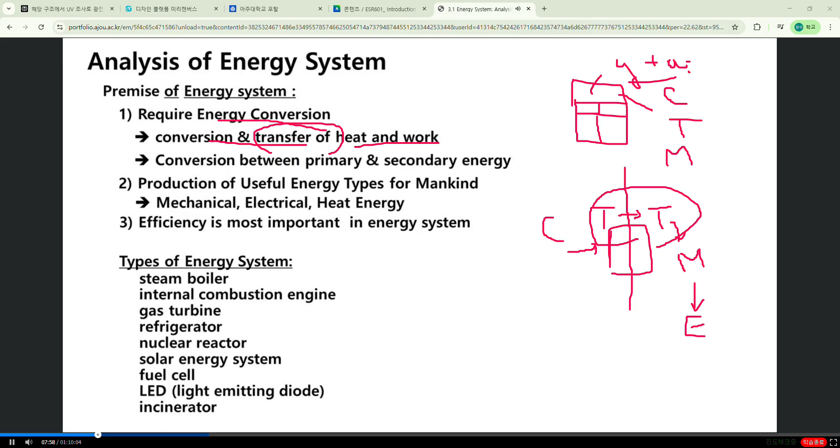Usually, in an energy system, there is conversion of primary and secondary energy. In this case, the secondary energy is electricity, and the primary energy is coal. Well, maybe this is not a good example.

If you have a refinery of petroleum, you put in the petroleum and you produce gasoline, diesel, whatever. In this case, petroleum is the primary energy, and gasoline, diesel is the secondary energy.

So primary energy means the energy that itself exists naturally, like coal, natural gas, and petroleum. Secondary energy is converted from primary energy into a form useful for human interest, like electricity, gasoline, and diesel, which are categories of secondary energy.

Another energy system premise is the production of useful types of energy, as I already explained. Electricity is useful to humans, and gasoline, diesel are useful to humans. Here, mechanical, electrical, and heat energy, and efficiency, is most important in the energy system.

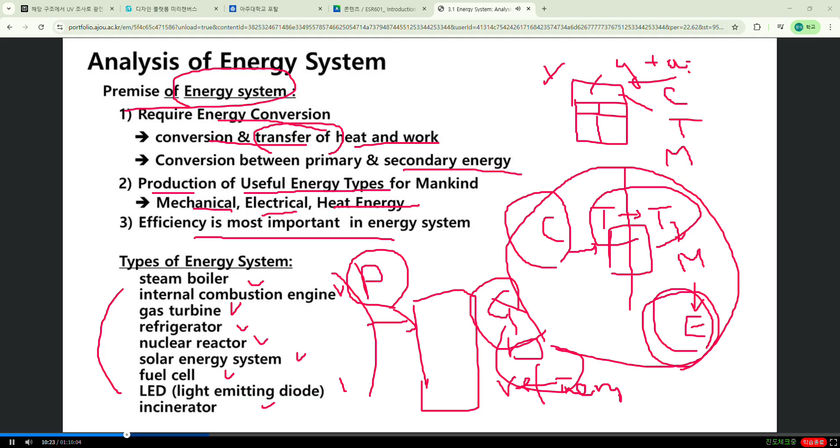However, I say here the most important thing is efficiency. Next, I'll show you the efficiency of different energy systems. There are very low efficiency ones, like the incandescent lamp, and very high efficiency ones, like the electric motor or electric generator.

Then how do you describe the efficiency? How do you define the efficiency? Usually efficiency is denoted as something equal to input compared with output, but the output should be useful to humans. So we say useful output. Efficiency is comparing the input and the useful output.

For energy conversion efficiency, the energy type changes - as I talked about previously, chemical energy changes into thermal energy, mechanical energy, electrical energy. Through this conversion, energy is conserved - that's the first law of thermodynamics, energy conservation. So initial energy equals final energy: E1 equals E2 plus E3.

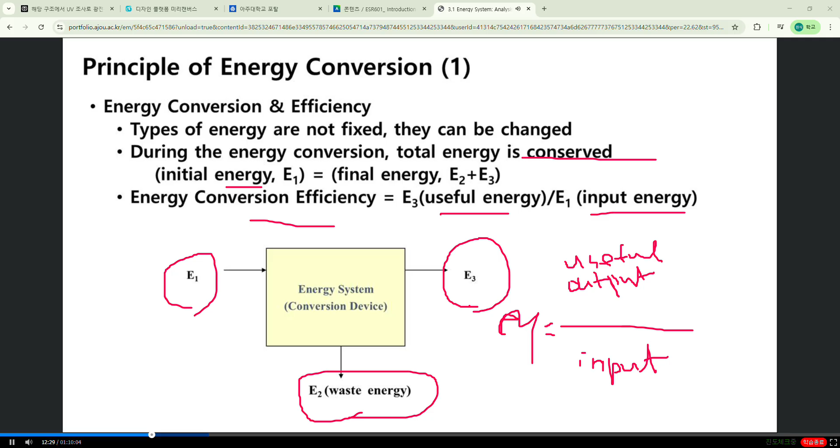I already talked about how there are many different energy types, and the efficiency can be very small, like the incandescent lamp, and the fluorescent lamp is only 20%. So we need to change this illuminating device into something else in the future, and that is going on right now - they're starting to change it into LED, light emitting diode.

Also, you know, changing into small heat engines - I mean relatively low efficiency heat engines like the steam engine and IC engine - into higher efficiency ones. So we want to change from this low efficiency group to a larger efficiency group in the future.

In energy conversion, heat energy is central - most fossil fuel based energy conversion systems operate through combustion. Once you make combustion, chemical energy is changed into heat energy. So heat energy is the key process of energy conversion, like in an automobile.

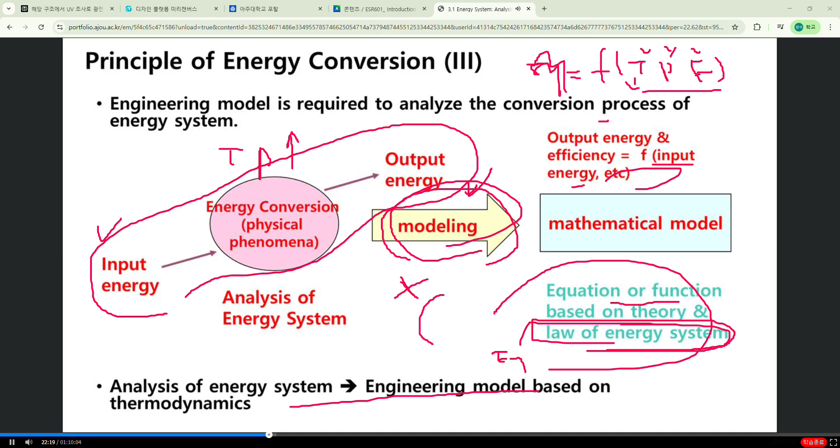You need the basic laws of the energy system, some basic theory required to develop the mathematical model. The most widely used basic law of thermodynamics is the first law of thermodynamics. Everybody knows that's energy conversion, energy conservation: heat equals internal energy plus work.

Heat is internal energy plus work: dQ equals dU plus dW. That's the first law of thermodynamics. Also, you can write it as delta U equals Q minus W.

Second law of thermodynamics - you can state the second law of thermodynamics in many different ways. With the second law of thermodynamics, you need to find out entropy. So this is entropy.

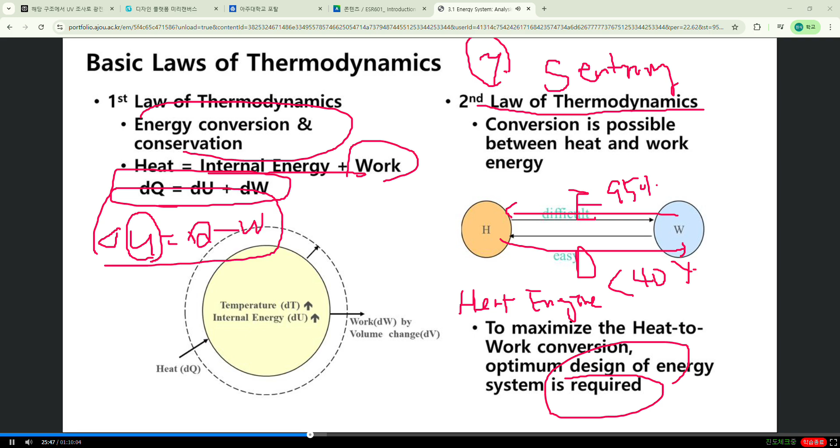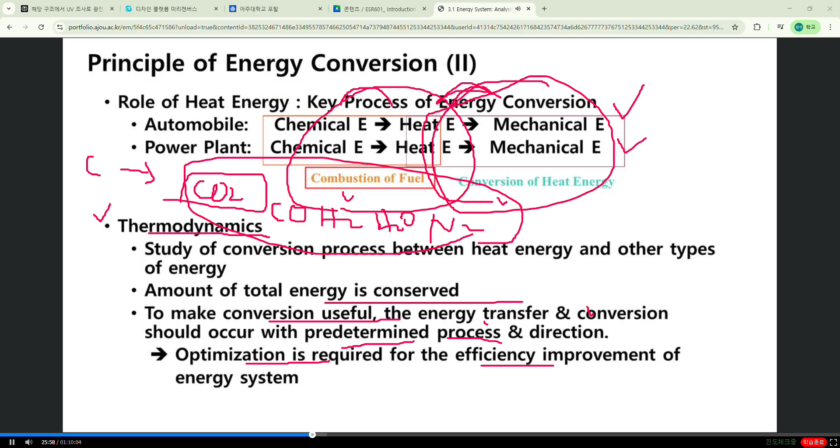Transfer of heat energy - they say the direction. You must go to a predetermined process or predetermined direction. This is the predetermined direction to make a heat engine: heat should flow down from the high temperature source to the low temperature source and produce work. So the heat efficiency is W divided by Q1.

In a refrigeration system, that's the predetermined heat direction the other way - from low temperature to high temperature. Because it's the same as water flowing from a higher state to a lower state spontaneously and producing work, like hydropower - however, if you transfer water from the lower state to the higher state, you need a pump, otherwise saying you need some work. Same thing: to transfer heat from the low temperature to the high temperature, you need work. So in this case, work is required - they transfer low temperature to high temperature.

We call that instead of efficiency, we use the coefficient of performance, because sometimes it's greater than 1. Coefficient of performance equals Q2 divided by W. So here the heat transfer from high temperature to low temperature is spontaneous; low temperature source to high temperature source requires work, like in a refrigerator, air conditioning, or heat pump - the same application.

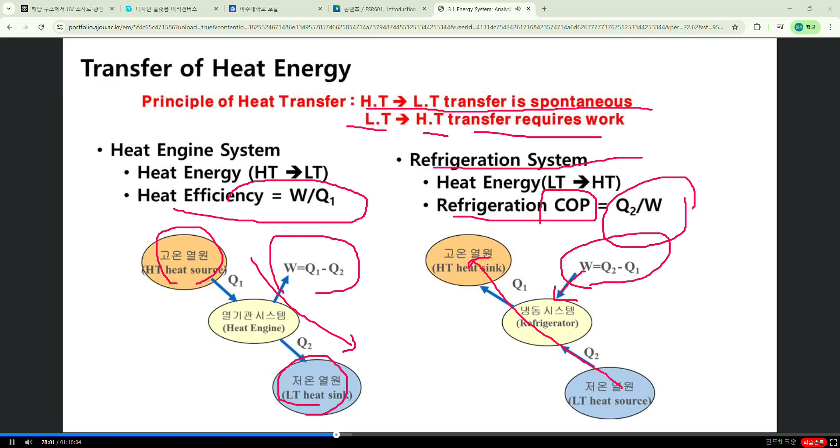So to analyze a heat engine system, if you want to analyze this heat energy system - let's say this is a steam turbine or gas turbine. Steam turbine usually is composed of a pump. You can draw it like this: pump, then boiler, then steam turbine, then condenser. Okay, this is the steam turbine.

So water is flowing through this way - that means clockwise, that's the clockwise direction. I mean the other way - like a refrigerator and air conditioner is counterclockwise, the other way. So at the pump, water is introduced and pressurized up to 150 atmospheres, usually, and modern steam turbines more than that.

Then that pressurized water goes into the boiler, and the boiler receives heat energy through coal combustion or a nuclear reactor. Because the water receives the heat energy, it becomes steam. So the high temperature, high pressure steam passes into the steam turbine.

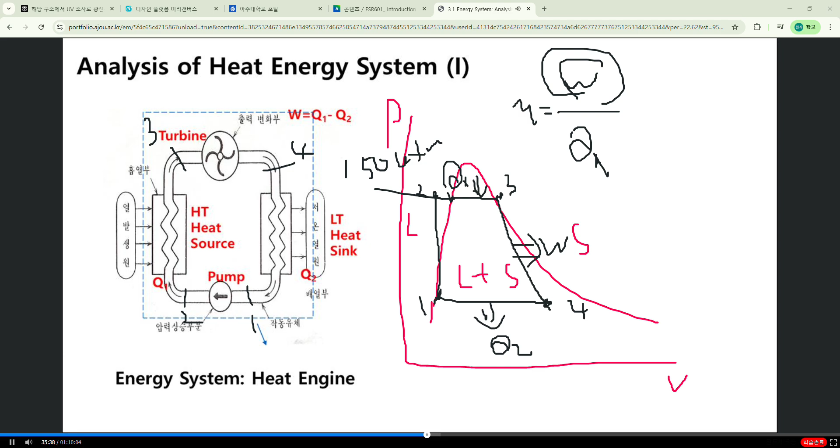State 3 and state 4 have the same entropy because it's isentropic expansion. So under the condition of the same entropy, you can find out how much steam and how much water exists at point 4. Through that, you can calculate the enthalpy of point 4 and point 3, and you can calculate W. That's what we call the analysis.

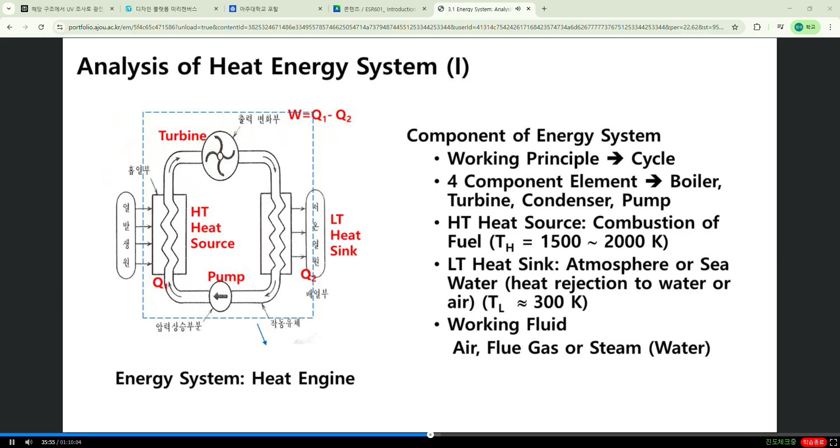Okay, I'll erase this. So the components of the energy system follow the working principle of a cycle. Cycling motion, cycle means a process coming back to the original state. The 4 component elements are: boiler, turbine, condenser, and pump.

The high temperature source is usually combustion fuel, about 1500 to 2000 K. However, the boiler temperature is more important because at the boiler, this high temperature source transfers heat to the boiler. The boiler is made with steel, and steel withstanding this high pressure and temperature right now can go up to a maximum temperature of 650 degrees C. So that's the high temperature. The low temperature sink is the outside temperature, 300 K.

Working fluid: steam for the steam turbine, water for the steam turbine. Or if you go to gas turbine, flue gas - you can assume it's air. So that's the working fluid, mostly flue gas and steam.

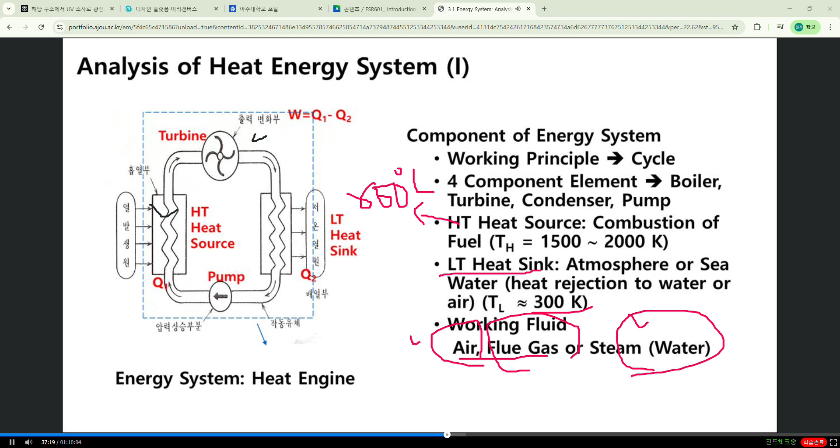The important thing between this and this: steam and water have a phase change. The water becomes steam, steam becomes water. However, with air or flue gas, there is no phase change within the cycle.

So there are two different heat source types: heat generation type and heat transfer type. Heat generation type means heat is generated within itself, like in an internal combustion engine where heat is generated within the piston, gas turbine combustor, fluid type nuclear reactor, and chemical reactor. That's the heat generator type.

This is the IC engine, this is a gas turbine combustor, this is a nuclear reactor, this is a chemical reactor. Heat transfer type includes the boiler, solid fuel nuclear reactor, and heat exchanger. This is the boiler, the solid fuel nuclear reactor, and this is the heat exchanger.

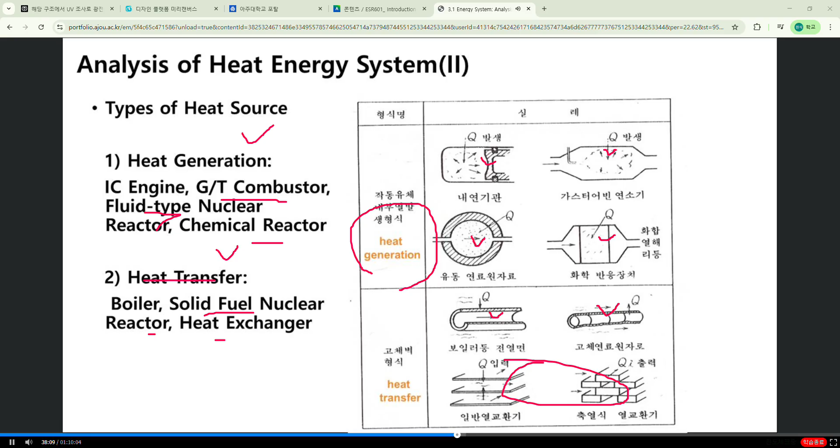The type of energy conversion device involves energy change within the working fluid, such as a nozzle, diffuser, or chimney. Energy conversion to mechanical energy includes piston, turbine, rocket, pump, gear, and rotary piston. Mechanical energy conversion to other fluid includes ejector and pneumatic conveying. Direct generation includes MHD and EHD.

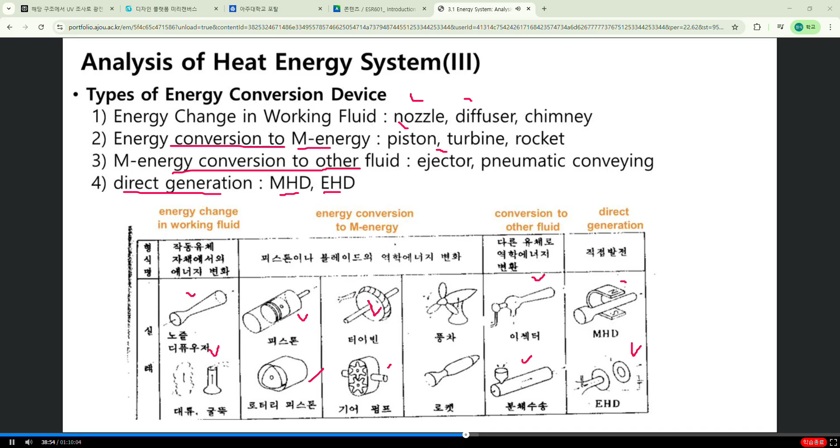So to do the analysis of an energy system, the parameter that determines the quality usually means the efficiency of converting heat energy to mechanical energy. Quality is usually expressed as efficiency. To determine this parameter, you need the type of cycle, like the Rankine cycle.

What kind of cycle do you have? Rankine cycle, diesel cycle. Within the Rankine cycle there's simple Rankine, superheat cycle, reheat cycle, supercritical cycle, and ultra supercritical cycle. Within the ultra supercritical cycle, efficiency can go up to almost 40%, while a simple Rankine cycle efficiency is only 35%. With this ultra supercritical approach, the pressure and temperature of the steam is increasing.

Another parameter is the temperature difference between the high temperature and low temperature reservoir, and the type of energy heat source, such as nuclear or coal - different energy sources determine the energy conversion efficiency. The optimization of the component elements and the entire system requires a mathematical model and optimization ideas.

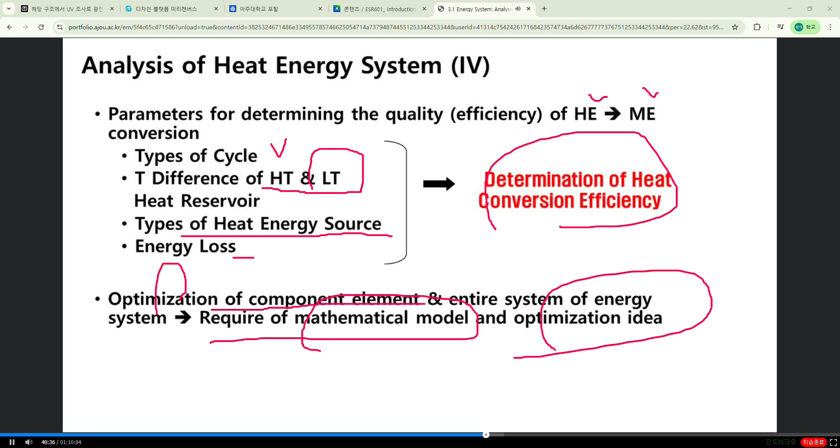When you make a model of the energy system, it's composed of several different components. Like the previous example, the steam turbine cycle has a pump, boiler, steam turbine, and condenser. If you want to make this component model, first build the individual component models, then put them together to make a total energy system model. So to make a model of a system component, a widely used method is the control volume method.

Control volume method means this is the volume you are looking at. We usually treat this as a black box - once you put something in here, everything inside this volume, the temperature and everything, is considered the same.

However, a more sophisticated dynamic volume has changes - temperature change within this volume - and you need to consider elements of this volume with elevation and the change between x direction, y direction, z direction, to make a dynamic model. However, here in thermodynamics, the black box model is okay. So we assume the control volume model, which is widely used in thermodynamics because everything inside is the same.

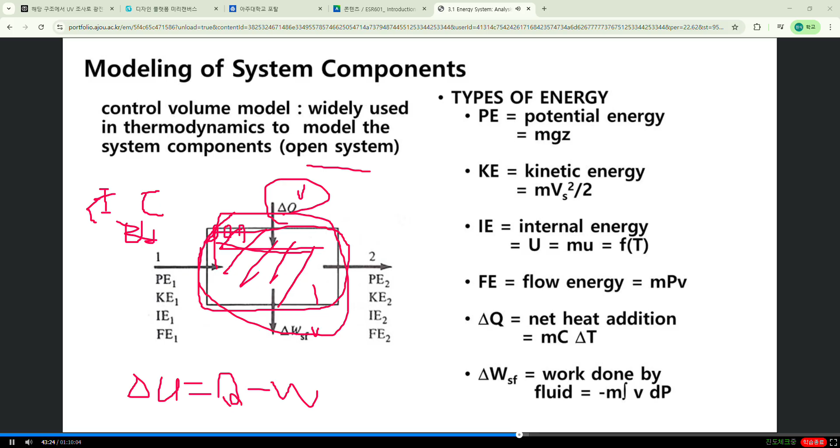U1 value and U2 - rather, I should say this is energy 1 and energy 2, E1 and E2. So in this energy system, let's say steam is coming in - for example, high temperature, high pressure steam is coming in. There's a potential energy. Here is high temperature, high pressure steam, and outside is low temperature, low pressure.

Steam plus water - if we assume this is a steam turbine, then state 1 has high temperature, high pressure steam with potential energy, which depends on the height. There's also kinetic energy, which depends on velocity. Internal energy depends on temperature. Flow energy depends on the pressure-volume change as the steam turbine flow comes in. So there are four different energies involved for the working fluid flowing in, and the working fluid flowing out also has the same potential energy, kinetic energy, internal energy, and flow energy.

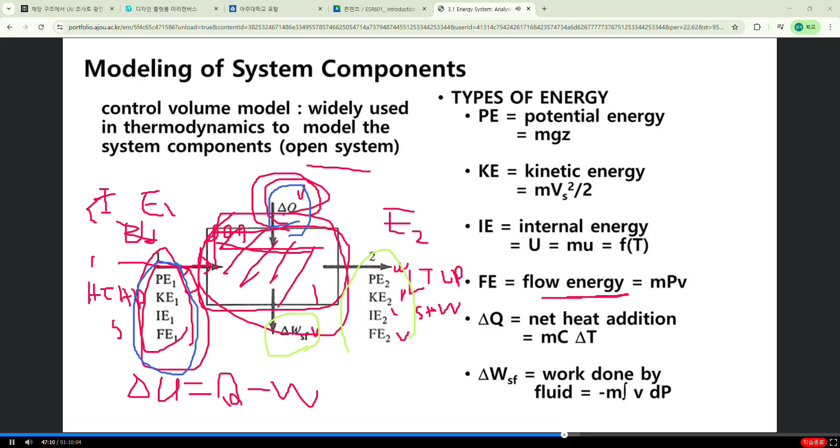So you can write down this equation: PE1, KE1, IE1, FE1, delta Q equal to this. Then you have this relationship because U plus PV, I equal to—let me change the color too.

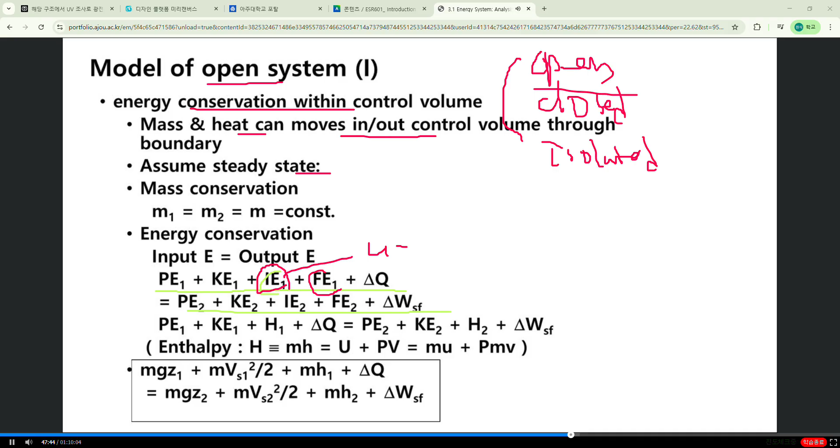What's I? I is the internal energy, that's U. Flow energy, I say that's PV, pressure times volume. U plus PV, that's H. I assume you guys graduated high school, right?

You guys graduated—we are in the graduate school of Ajou University. You guys graduated college, 4 years, university within this science area, science engineering area.

You need to know this thing, enthalpy. Even high school chemistry, high school physics teach this—the enthalpy. So enthalpy, U plus PV, instead of this one you put here.

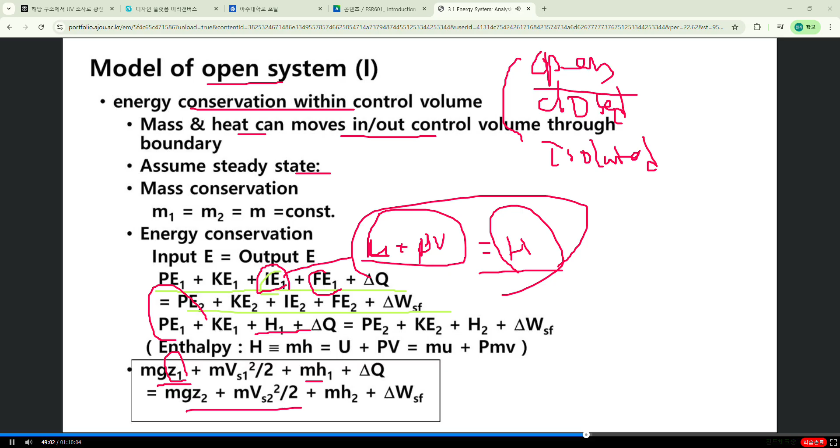So you have this relationship: mg, the potential energy equal to mg times height, z1 equal height, and the kinetic energy equal to m/2 v squared, velocity, and h equal to enthalpy of state 1, and this is state 2. That's the energy conservation equation.

So for the boiler—well, what's the boiler mean? Water coming in and steam coming out. Water coming in through the pipe, inside the pipe, steam coming out inside the pipe. So there's not much potential energy change, maybe several meters. If it's 0 meter here, maybe 3 meters there, however that is minimal, so potential energy change is the same.

Kinetic energy, maybe velocity changes a little bit because water became steam, but within the pipe there's not much change, so kinetic energy equals the same. The boiler is not working—there is no work involved here. So delta Q, you can calculate as m(H2 minus H1).

That's the one we need when you calculate the steam turbine cycle, W divided by Q1. So Q1 can be calculated by this equation.

Gas turbine or steam turbine—P2 lower than P1. In the steam turbine, pressure can range from 1 atmosphere to 200, 150 atmosphere, so compared to that this is minimal. So temperature—gas turbine steam temperature is 650, for the steam temperature around 30, that's centigrade. If you express as Kelvin scale, 300 changes to 1000.

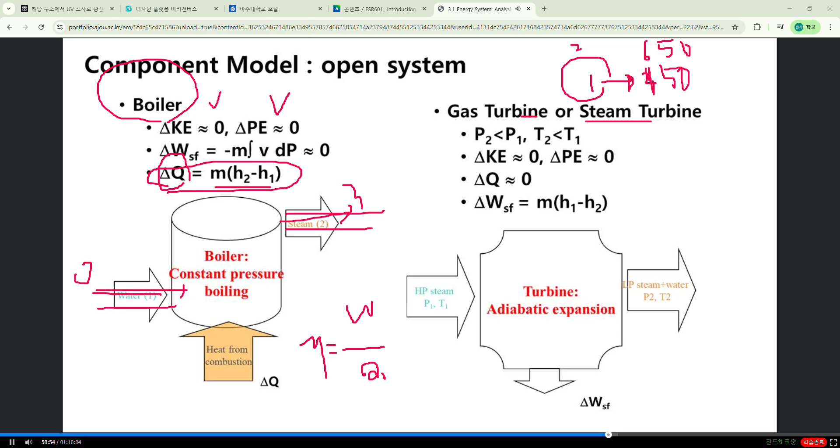Gas turbine temperature is even higher. So because of this P1, P2 condition, the kinetic energy and potential energy are almost the same.

And Q equals 0 because this is not a heat transfer device, this is a work producing device. So you can calculate W equal to this equation. So this one goes here, this one goes here.

You can calculate efficiency. So what do H1, H2 depend on? That depends on the temperature and pressure of each state. That's the reason why higher temperature, higher pressure of the steam state increases the efficiency.

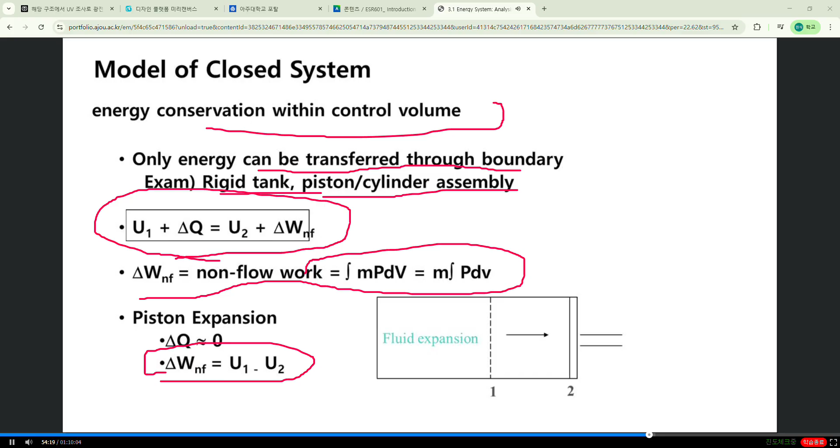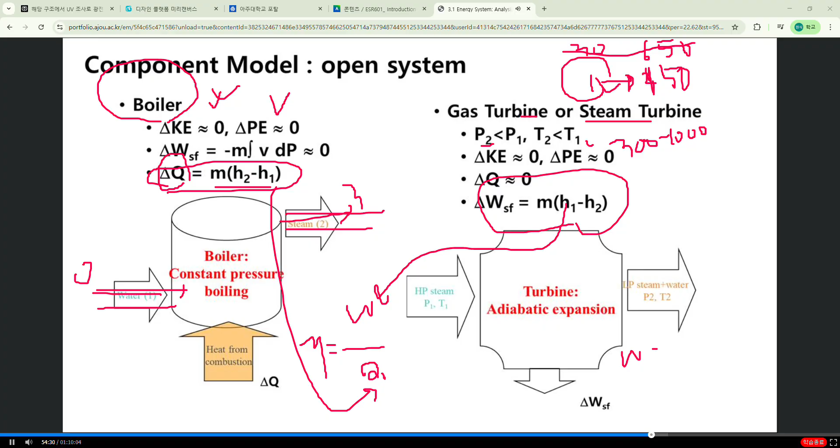So you need to know what's U1, what's U2 in this case, and what's H1 and H2.

There is a relationship between pressure, volume, temperature, and entropy change that can be determined with different processes, using the ideal gas law or steam table. For water, we use a steam table; for gas, we use the ideal gas law, with processes like isobaric.

With a different process, the relationship between pressure, volume, and temperature is different. That means if the process is isobaric, the PV relationship...

Isobaric PV relationship: here's volume 1, this is volume 2. Isobaric means pressure is the same, so if you change from volume 1 to volume 2, you go like this - same pressure. That's isobaric.

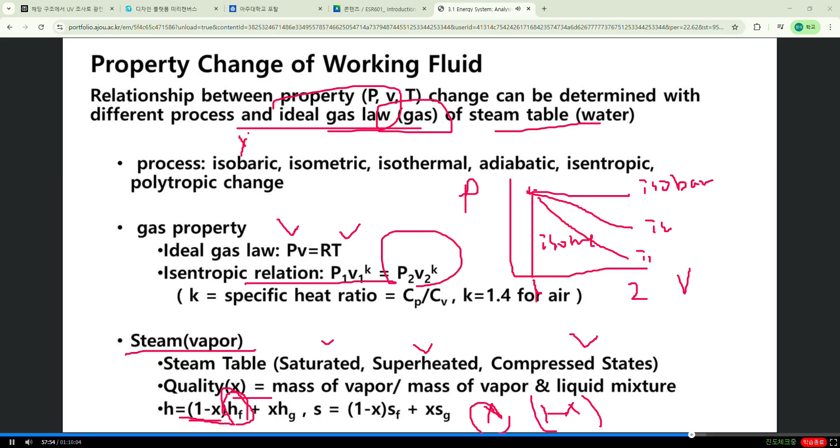Irreversibility and energy loss. A reversible thermodynamic process means a process that can be completely reversed - every change caused by addition or subtraction of heat or work - without an external energy source.

Reversible physically - picture a piston moving like that. Here's a piston: if you put small stones or gravel on it continuously, the piston moves down. If you take out these stones and it goes back to the original state, that's reversible.

It never reaches that in a real situation because there is always friction. The real process is irreversible because of friction, heat transfer, mixing, and throttling.

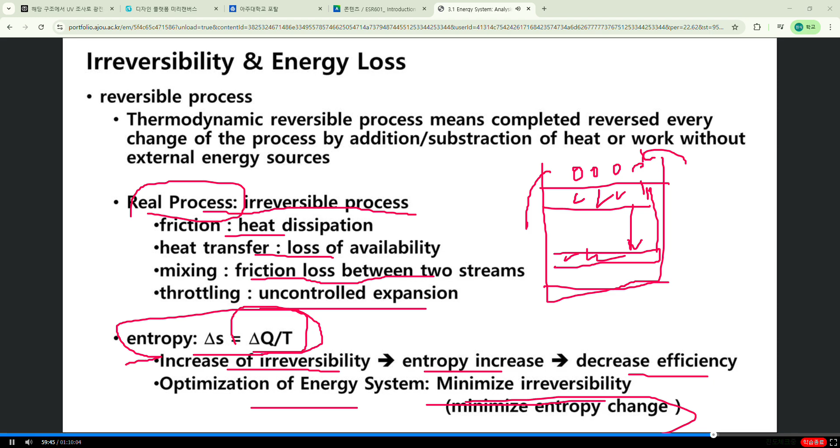If you want to analyze an energy system, especially in design, you need engineering. Engineering, as I already explained, is the manipulation of nature to create a system for the benefit of at least some segment of humanity.

If you want to build a hydropower plant, you know water flows from a higher place to a lower place through a river - that's nature. Then you make a dam, here at the top side, and put in a turbine to produce hydroelectricity.

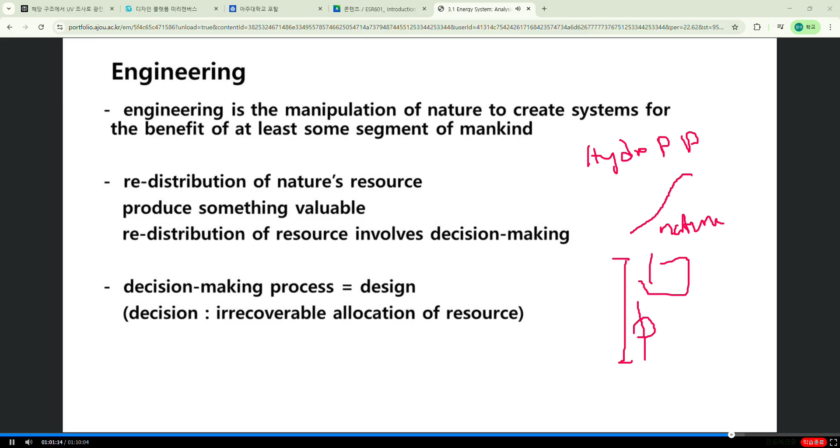To do that, you need to decide the height of the dam based on the bottom position, how much reservoir space the dam needs, where the rotor is located, and how much electricity the rotor produces. This is engineering - another way of saying engineering is the redistribution of energy resources for something valuable.

So when you redistribute resources, it involves decision making. We can decide: is this 10 meters or 8 meters? If you make this one 10 meters, the cost may be 100. If you make this one 8 meters, cost may be 50. Then, 10 meters produces more energy, 8 meters produces less energy. Yeah, that's all engineering.

Calculating the benefits - the decision-making process we call design. Design is irrecoverable allocation of resources. So when you make a design, it's very important - once you act on nature, you cannot recover it.

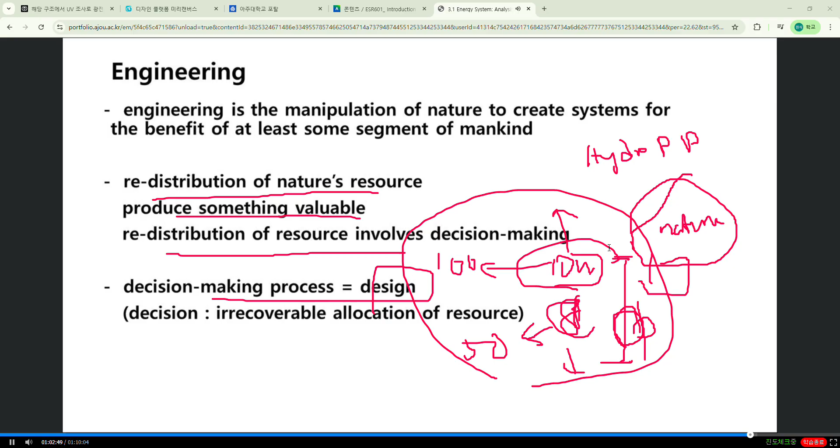For example, if you have a small town without electricity, you want to build a small unit, a small gas-fired system - let's say a biomass gasifier gas engine system. That's a need, an opportunity. Opportunity means you have enough capital cost, enough money, enough technical ability. That's opportunity.

Then you determine and specify the criteria of success. If this is a private project, a private business, then maybe you can calculate the return - how much of the investment capital cost, the ROI (return on investment), how long it takes to get back all the capital cost. That's if it is a private project.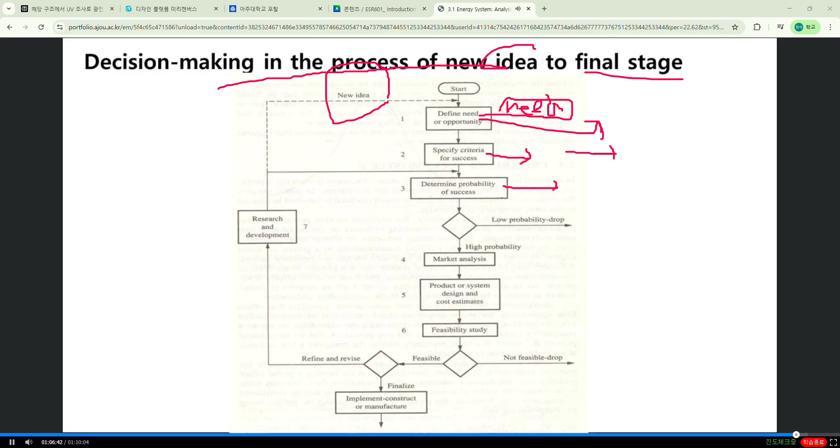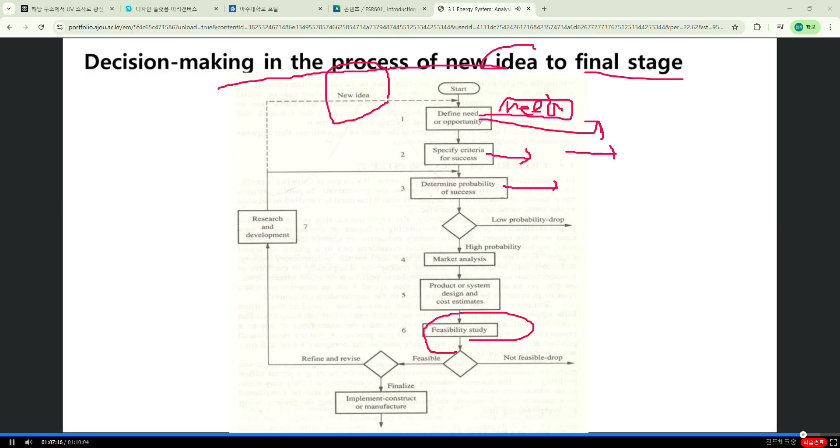Then you do the market analysis. If the probability is low, it's dropped; if probability is high, you go to market analysis and design, then design and cost estimate, feasibility and availability - capital investment, land, labor, zoning, regulation, safety codes, and research and development also. Research and development and feasibility study - if it's feasible, it goes through R&D and back, routine several times; if not feasible, it's dropped.

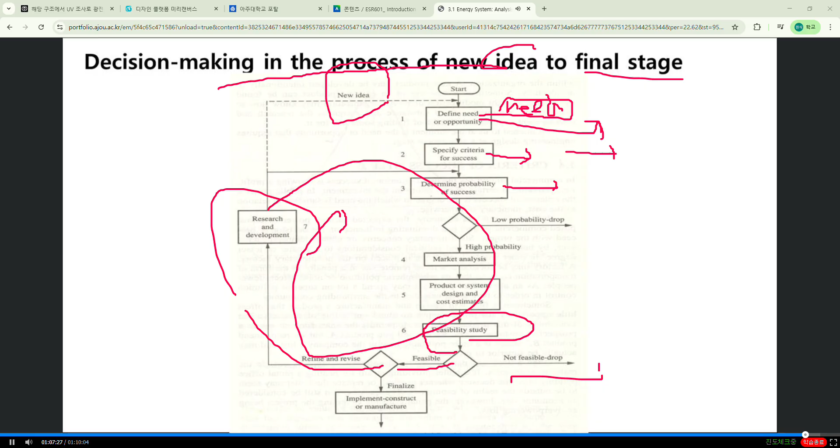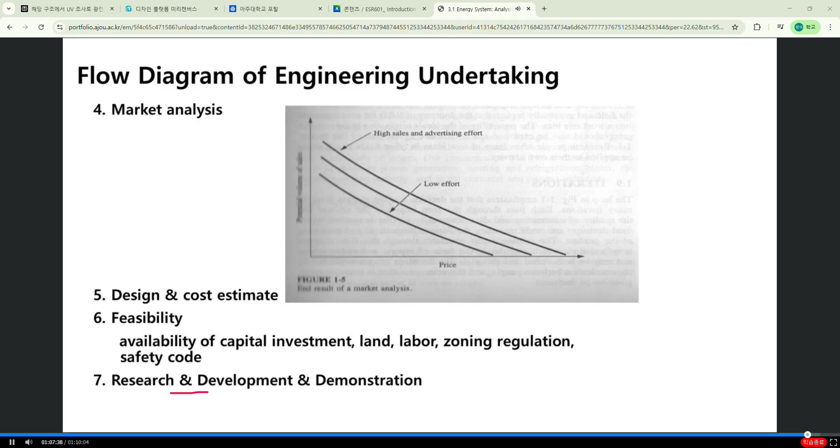That's the engineering method, from the new idea to finalization: design, research and development, demonstration and iteration, decide go or no-go, finalize construction, and optimize the operation. Within this, you should optimize the operation to reduce the cost.

Most of what I'm saying in this lecture is analysis of the energy system. How do you do this? You make a model first - an individual component model first, and put it together for the total energy system. An individual model is usually based on energy conservation - the first law.

So you can make some kind of equation of the individual model, then put together the individual component models to make an energy system model. Once you make this model, you can refine it through research and development - maybe change a component into a more efficient one, and finalize it through the engineering sequence.

Okay, this is the end of this lecture. I think I'll give some homework - define your own energy system, whatever energy system you choose, and describe it. The second part is how you would analyze that energy system. That's the homework for this first day. Thank you.